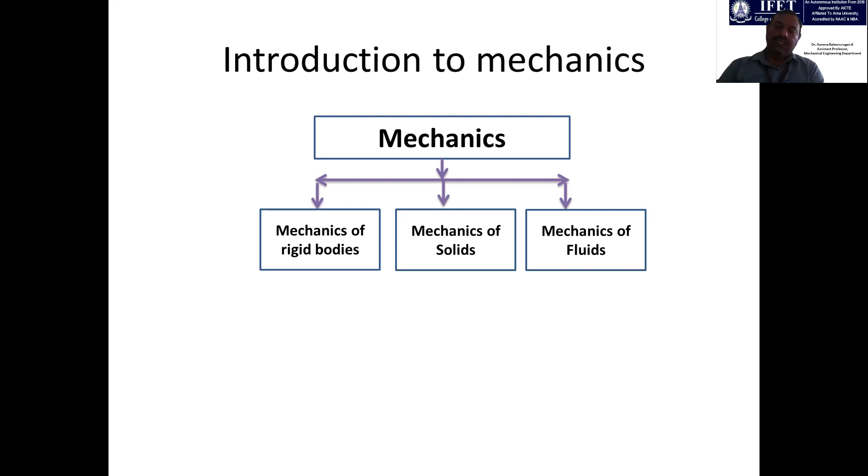This is the content of this course, otherwise you can say the syllabus of this course: introduction to stress and general state of stress, introduction to strain, material properties, torsion in circular shafts, shear forces and bending moments, bending and shear stresses in beams, columns, complex stress and strain, and pressure vessels. These are the syllabus for this course, and most of the gate problems arrive through this syllabus, all these contents.

We will see one by one the basics of each and every content, and we will see the gate problems of each content and solve them, and we will get well versed in these particular problems, and build the confidence to face the gate exam. After completion of this course, I promise you will very confidently face the gate mechanical engineering syllabus, and you will confidently attempt the strength of material questions.

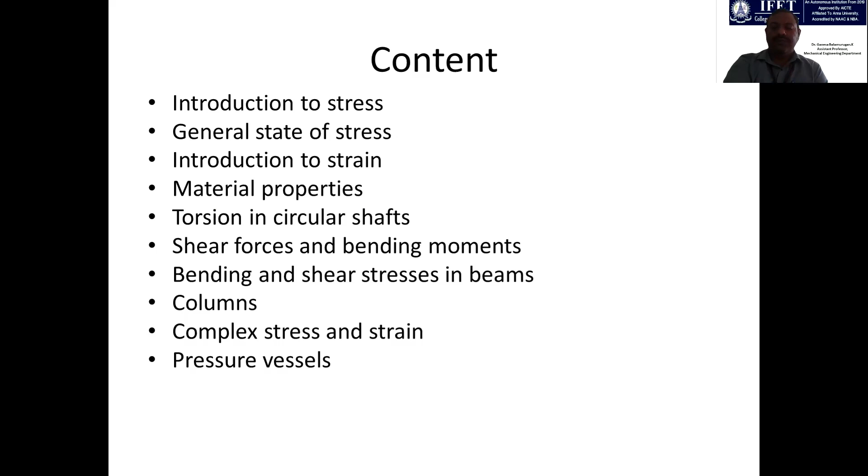So introduction to stress. What is this stress? It is the measure of internal resistance of the body against the external load.

So here we are learning, in the mechanics of rigid bodies, a number of reactions for the action of forces. These reactions, while applying any force on any structure, the force will depend upon the magnitude of the force. It will try to change the dimension, and this change in dimension will be termed as deformation. But at the same time, the material will resist this deformation or change in dimension, and it will offer this resistance, and this resistance is called stress.

So it is experiencing some stress. Like us humans, we are also experiencing stress. If any tension or external things happen, internally, our mind and psychologically we give resistance for the breakdown, and during this process we experience the stress.

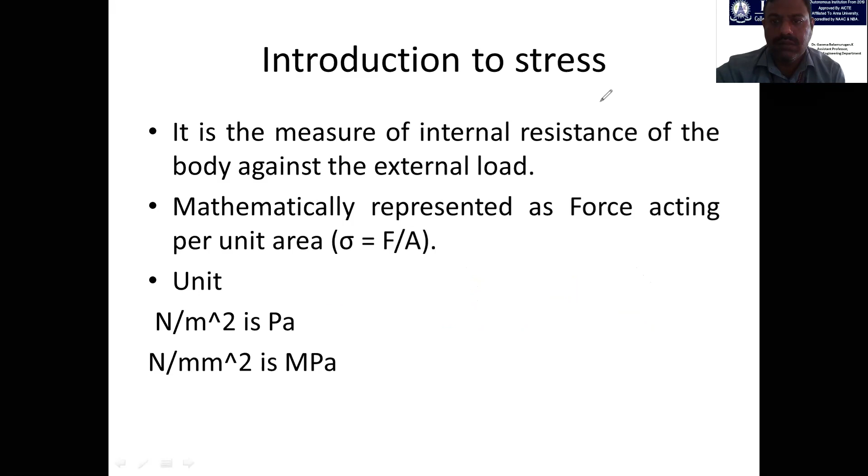So here, how these stresses are generating? By application of load only, these stresses are generating. So the stress depends upon the deformation, I already told you. If the deformation is uniform, the stresses are uniform. If the deformations are not uniform, the stresses are not uniform. That is why we are grouping the stresses as uniform stress, linear stress, and parabolic stress like that. Now, based upon the loading condition, that is, application of forces, the stresses will vary.

Here we can group this. If you understand this concept, it will be more helpful for solving all the problems in strength of materials. So now we can group these loads into two categories.

One is force, and another is moment. The force which is equal to load, and the way that force is applied on the structure, we can categorize it as force and moment. So depending upon how that particular force acts on the structure, we group these as force and moment.

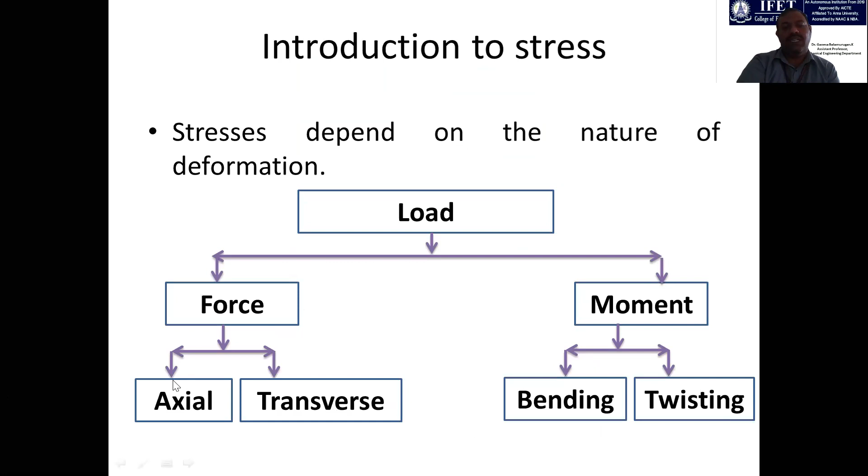We've already seen that forces are subdivided into axial and transverse. Now, axial forces create axial stresses - mostly tensile and compressive stresses - and transverse forces create shear stresses.

The moment type of load creates indirect stresses. This moment then creates bending, and this bending moment will create bending stress in structures. Mostly in beam and column type problems, you will experience this type of bending moment and bending stresses.

And twisting type of moment will create torsional stresses, mostly in shafts - circular or rectangular - that rotate at a particular RPM, fixed at one end or attached to transmit power. These shafts experience twisting moment and torsional stresses. I will explain each of these now.

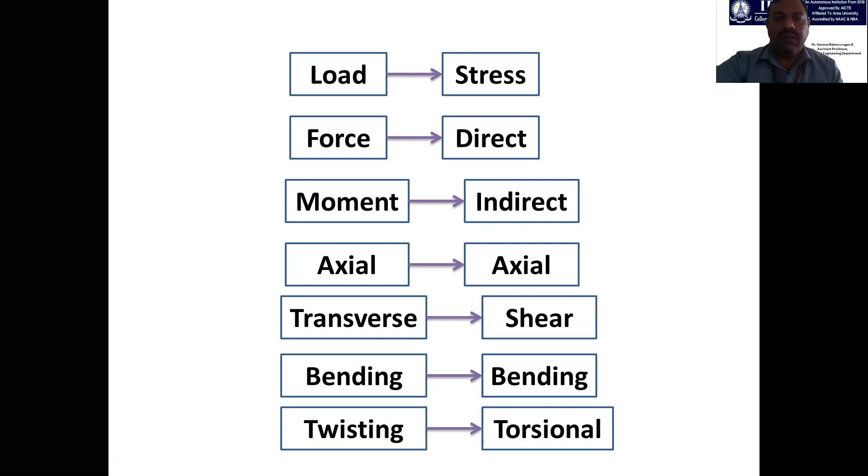Now I will explain about the type of forces. Consider this one structure, and we are applying forces in the axial direction, along this axis.

These are the axes. This orange line represents the axis - per engineering or machine drawing standards, the axis should be shown as a dotted or segmented line, but due to limitations, I'm showing it as an orange line to distinguish it from the structure. The red arrows represent the forces.

These forces are applied along the direction of the axis, and they try to deform the material in an axial way. Most probably, if it's a cylindrical specimen, it will reduce the diameter, or if circular, it will try to change the cross section. These are axial forces - I'm talking about forces, not stresses.

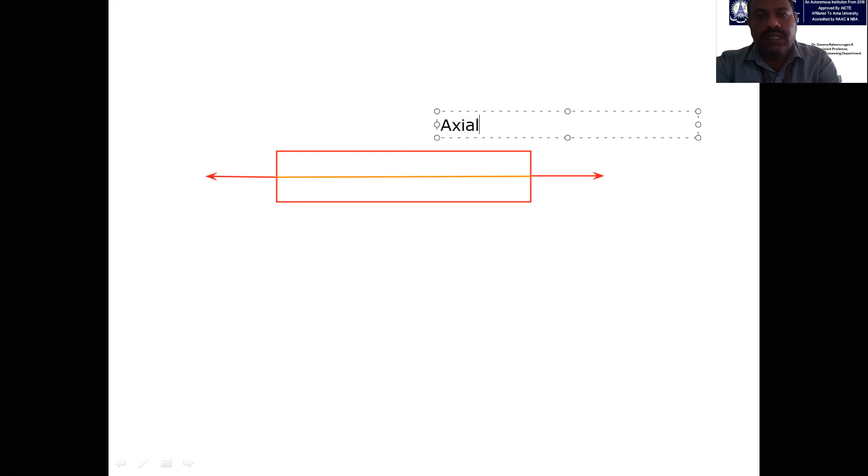So I'm explaining about axial force - this is axial force. Now, what is meant by transverse force? We will see this again with the same example and structure.

Assume this is the same structure, and I'm applying the load like this - I'll change the color of the load for your understanding. This is the direction, and this is the axis, passing through the center. Because I'm applying the load perpendicular to the axis - previously in axial forces I applied along the axis, but here I'm applying force perpendicular to the axis.

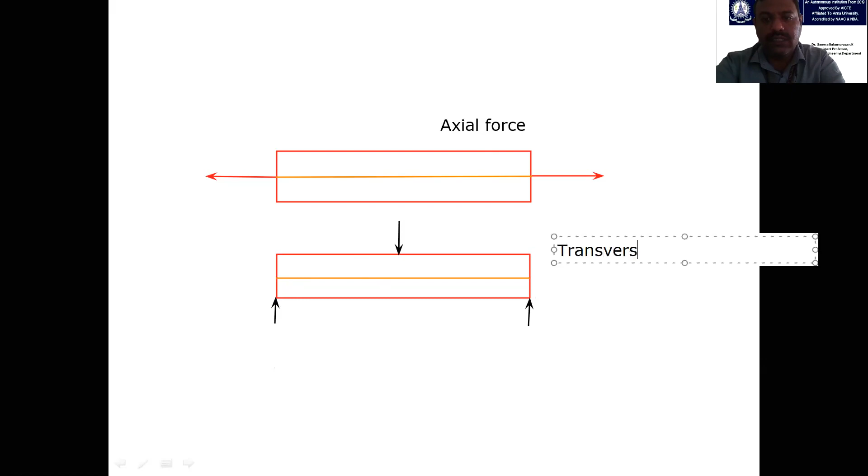I will get the reaction like this at this end, and similarly at this end also. These type of forces are called transverse forces, and these transverse forces create shear stresses. Because we apply the load at the center and the reaction occurs at the edge, it creates a shear value - that is shearing.

Cutting the material into half - trying to cut the material into half - that is called shearing. The axial forces are responsible for creating this pulling direction along the axis, which creates tensile stresses. If the direction of the arrow changes to pushing, it creates compressive stresses. Mostly these transverse forces create shear stresses.

And now we'll switch over to moments. So what are moments? I will explain.

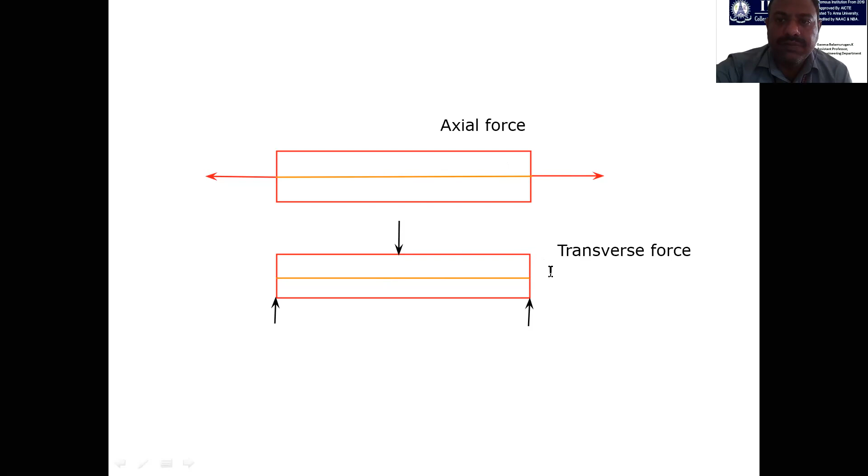So now assume this is one beam, a circular beam or a rectangular beam, whatever it may be. I'm fixing at this end. For representation of fixing, I have to show it like this, then only it is understood that this particular edge is fixed.

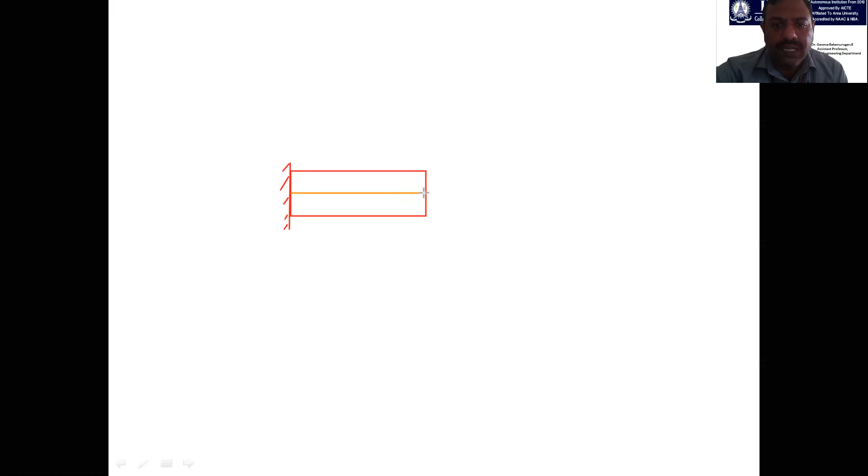This particular edge is fixed, and I will draw the axis of it. This orange line is the axis, and I'm applying the load. I'll mark it as black along the axis, and now we will discuss about the moment.

Actually what will happen, this moment, if I am applying load like this, mostly the material will extend along the direction, try to change the dimension along the direction. Then it will be the forces. This application of load is forces, and it will be the tensile deformation, or maybe a compressive deformation.

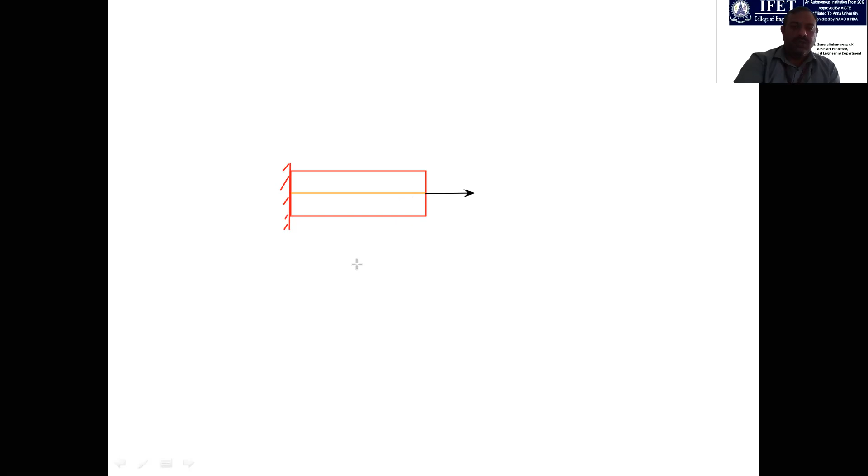Assume this here, another example I will tell you. So this may be another structure, and I am fixing this edge here. Okay, and the axis will be here like this.

So this is the axis, but the application of load is here at this edge. The arrow mark is the load, and these black lines, these black blocks, are the structures, and this orange line is the axis. These loads are not applied along the axis, and they are not perpendicular to the axis either. That also you have to mention.

You can ask, previously the transverse loads are not applied along the axis, but they are applied perpendicular to the axis. But in previously the force type of loads directly make impact, they are directly applied on the axis. It may be along the axis or perpendicular to the axis. All the effects of the load are on the axis.

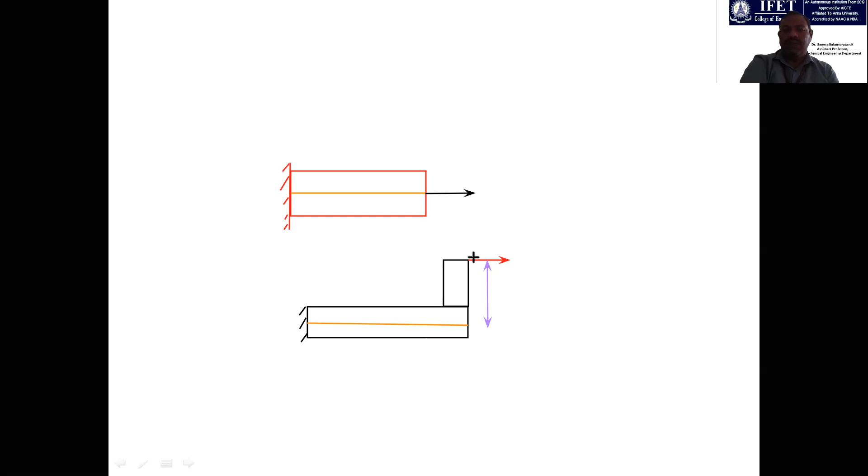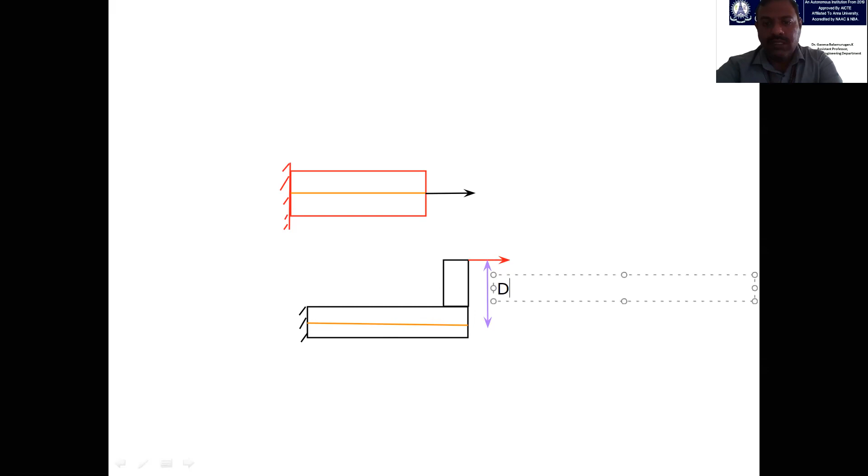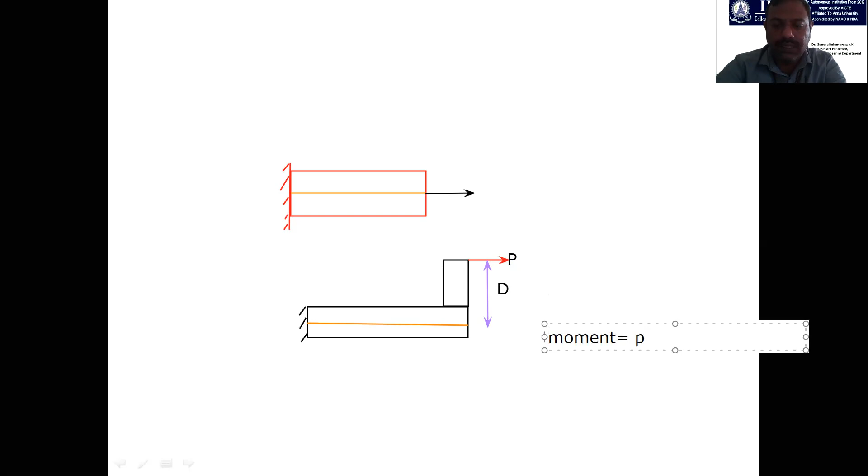Maybe this distance, this distance is D. So this force P, this force is P. And how we can write this moment, which is equal to P into D, Newton meter, moment. The force into distance, that is the unit of this moment, Newton into meter.

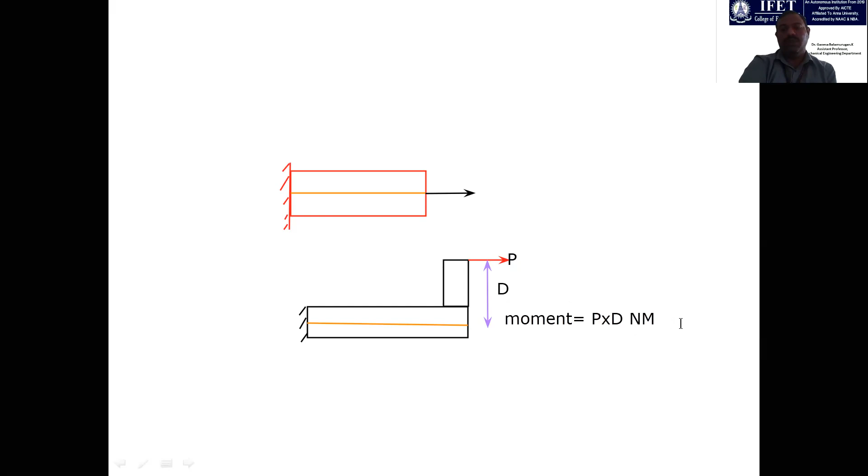It will create different types of stresses. This moment is not acting along the axis, and it is not perpendicular to the axis. Simply, I can tell these are not forces, I cannot use the term force. These loads are not actually acting on the axis, but away from the axis, from the distance, and it will create something called moment.

And these will tend to rotate this structure, or this type of force loads will tend to bend the structures. So bend the structures, these moments can be calculated, mostly calculated by force into distance, that is Newton meter. So these types of loads will be responsible for bending and twisting, and these stresses, bending stresses and twisting stresses, that is torsional stresses.

So the moments responsible for bending of the structures are bending moments, and the moments responsible for twisting of the structure are called twisting moments. And the stresses caused by this bending moment are bending stresses, and stress caused by the twisting moment are torsional stresses. Okay, if you take the cross section, the cross section means what?

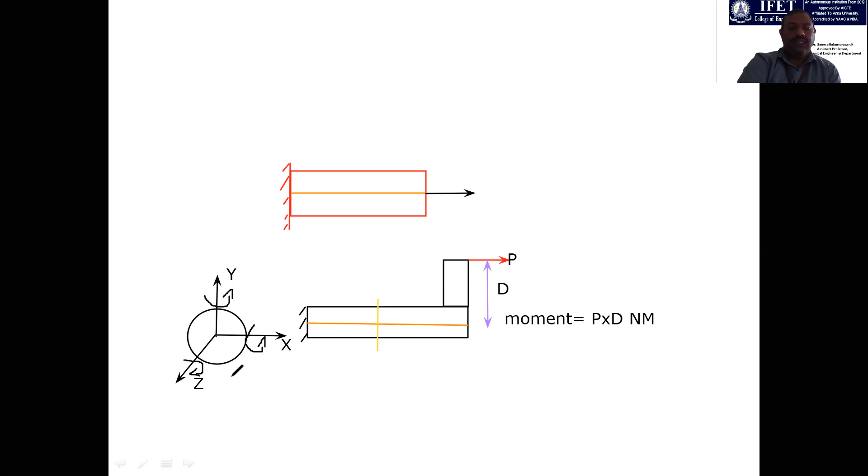So now you can see my fingers towards you. For me, again it is perpendicular, so it's projecting out. I'm applying the moment here in x direction moment, y direction moment, and z direction moment. So the moment that is acting.

So the moments are responsible for parallel axes. Moments responsible for parallel axes are called bending moment. So this bending moment, for example, I can tell here.

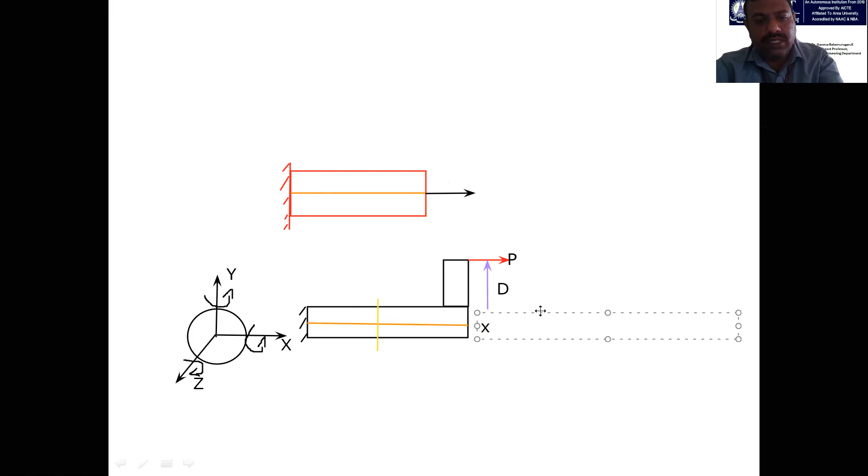This is X. So this direction is X and this direction is Y, and perpendicular to this cross section is Z, right? So these moments, so for this representation, how do we represent this axis? For example, I'm telling here, this is X, this is Y, and this is Z.

In this view of representation, the front view, for example, this is the front view of representation. This is X, this is Y, and this is Z, right? So if you take the cross section here, you can see this cross sectional plane. Then you can imagine that this is Y and this is X, and perpendicular to this plane is Z, right?

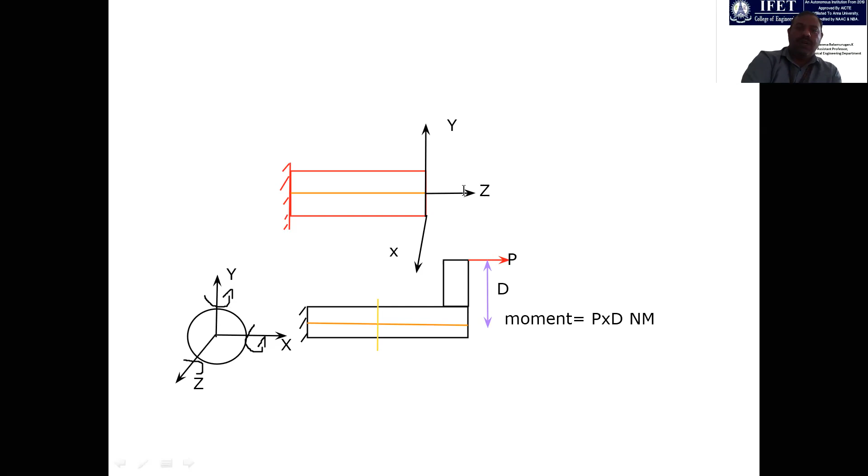Now you can see this twisting - any moment applying on the Z direction is responsible for twisting. It will create some twisting effect, and these are called torsional stresses or twisting moment, and this twisting moment will create the torsional stresses.

For example, assume I'm taking this pen, and this is Z direction, this is Y direction, and this is X direction in the front view. And if I'm taking a cross section like this, this is the cross section.

So now for this cross section, this is Y direction and this is X direction, and the thing you are facing is Z direction. X direction, Y direction, Z direction - this is for the cross section plane, but for the front view, this is X, and this is Y.

If I apply any moment in this Z direction, this whole structure will twist like this, and this is called torsional effect. This twisting moment is called torsional. This will create the torsional stresses along the cross section.

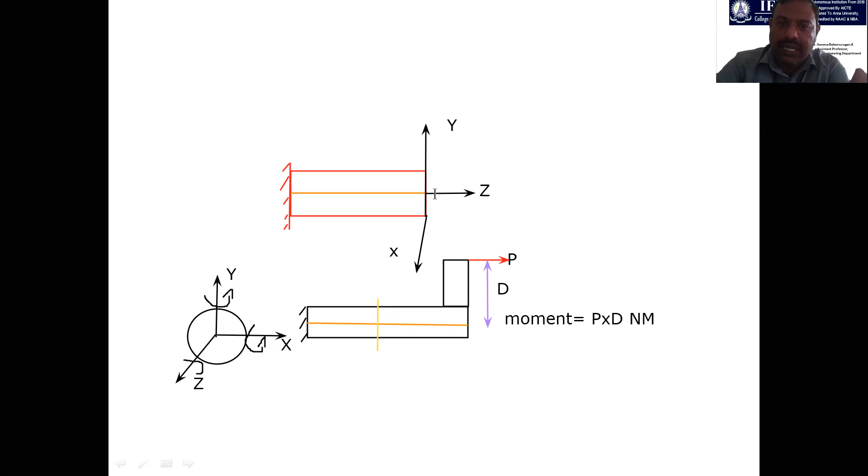This is one bending, and this is also bending. I am trying to rotate the structure in the X direction, and this is called X-axis bending. These effects are bending - moment occurring at the Y axis and X axis are called bending, and the moment acting on the Z direction is called twisting moment, which creates torsional stresses. The moments causing effects on Y and X are called bending, and they cause bending stresses. So you have to remember that in your mind.

Whatever machine design and other strength of materials problems, if you understand this basic concept, you can easily solve the problem.